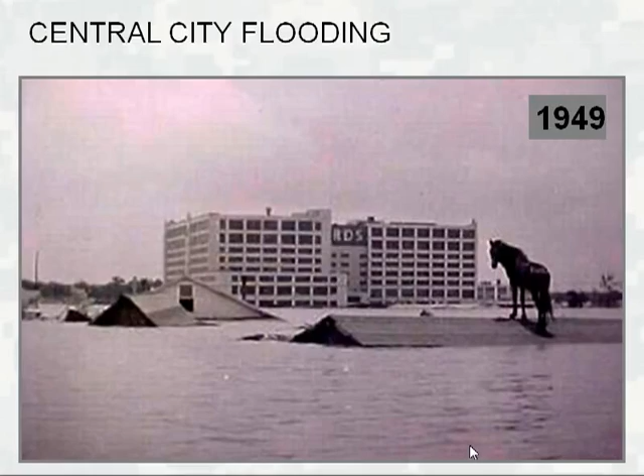It started back in 1922, Fort Worth flooded. Can you hear me now? Back in 1922, 10 people died and 3,000 acres flooded. Then in 1949, I'm sure everybody has seen this picture many times, but there was another flood in Fort Worth. This one was much worse. There were thousands that were homeless.

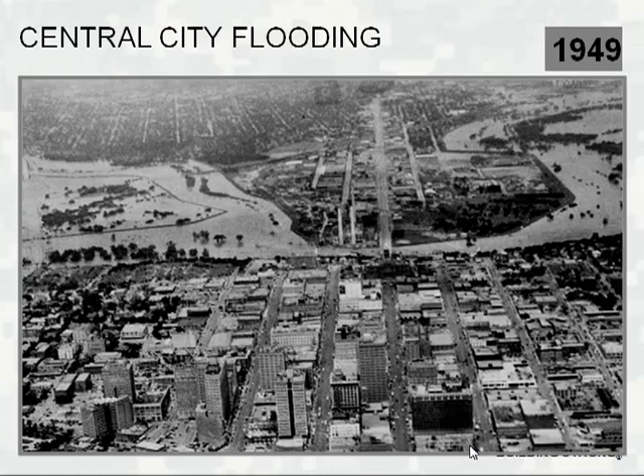So the Corps at this time was invited by the leadership to create a district in the Fort Worth area. We were established in 1950 after the 2 disastrous floods in the area. We're currently responsible for the water resources development in 2/3 of Texas. Not all the state, I wish we were, but we're not. We're responsible for the military design and construction in Texas, Louisiana, and New Mexico. Our geographical area covers 410,000 square miles.

Since the inception of our district, we have constructed 25 lakes, 2 major floodways, many local projects, and 2 tunnels for flood damage reduction. The cost of all these projects, in 2005 dollars, is $3.2 billion, but it's prevented more than $70 billion worth of flood damage.

Besides the flood damage, the lakes and the floodways have provided numerous opportunities for millions of visitors, while we furnish about 35% of the state's water supply.

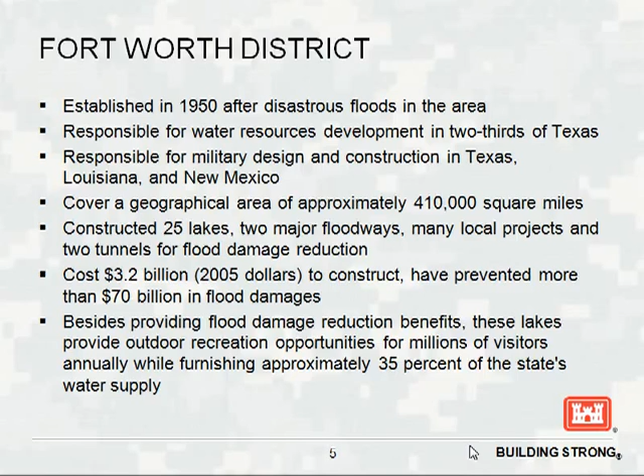Another concern that was presented to the leadership, besides the flood aspect, was the growth that was happening over in Fort Worth. The levee was constructed back in '57, designed for a 1960s population. However, in Tarrant, Parker, and Wise counties, the population has just exploded since then, and it's caused numerous drainage problems and added to the issues we had with the levees. Right now, we're projecting that Fort Worth grew 39% just in the last 10 years.

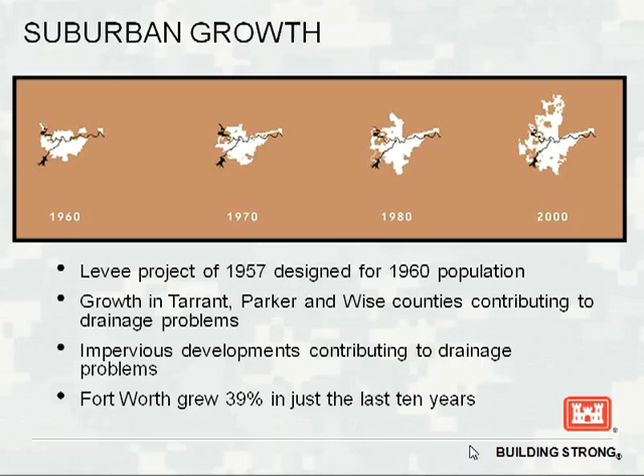So for the government to get involved in a project, we have to be authorized. I'm sure those of you that have worked with the Corps, worked with the government, all know this, and so some of my presentation may be redundant to you, but in 1965, the River and Harbor Act actually authorized this project for the Corps to start working in these flooded areas.

In 2003, the Trinity River Master Plan was created with TRWD, Tarrant Regional Water District, and TRVA, Trinity River Vision Authority. The Energy and Water Development Appropriations Act, or what we call WRDA, then gave us the authority to actually work on the modified Trinity River Vision Plan as far as the government is concerned.

Without that, we wouldn't be able to spend the government's money, but they did put a cap on us that the costs were not to exceed $220 million, and that it had to be split 50-50, with the Corps part being $110 million and the sponsor's part being $110 million.

There's projections, and I get a lot of questions about, is it a true 50-50? There are some things that the government doesn't work on. We were not authorized on this project to do any HTRW, so the sponsor has to do any environmental cleanup before we can proceed in a certain area on the project. So even though it's a 110-110 split, it's not a true 50-50 split.

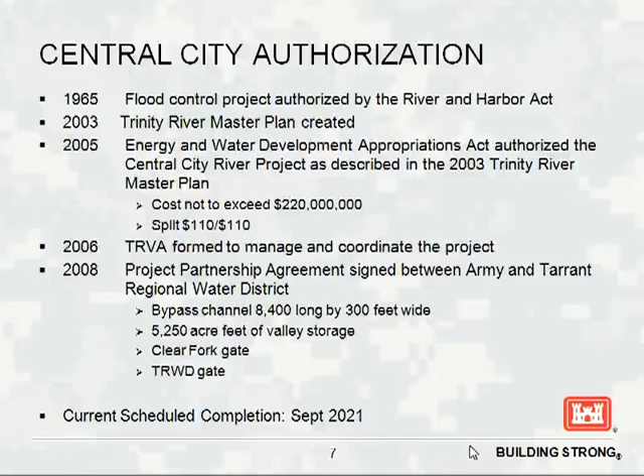The partners that we have, our sponsor is the Tarrant Regional Water District. The portion of that district that I work directly with is TRVA. Our local partners are the City of Fort Worth, Streams and Valleys, and Tarrant County, and we all work very closely together. Other interested parties in this project are the Federal Highway Administration and Texas Department of Transportation.

This is the current levee system that we have. And if you'll notice, the buildings are all set way back from the water.

When the project got started, TRWD had a lot of public meetings. One of the things the public always wanted to know is, why can't we have a waterfront like San Antonio? That was a big deal to the people. They wanted a river walk. They wanted to know why the buildings have to face their backs to the river instead of the front, and couldn't we make the river more friendly to the people?

So they came up with a combined goal. The Corps and the government's main priority is flood protection - we are in the business to save lives. But we also note that people in general like the San Antonio Riverwalk. They like being able to go to the river, go swimming and kayaking, and have parties in the water. So we have combined goals.

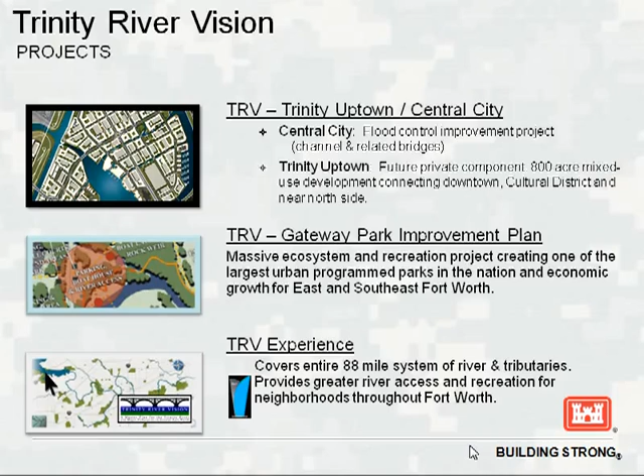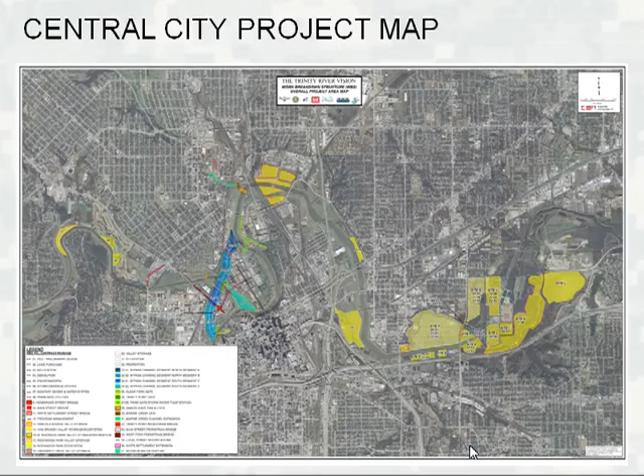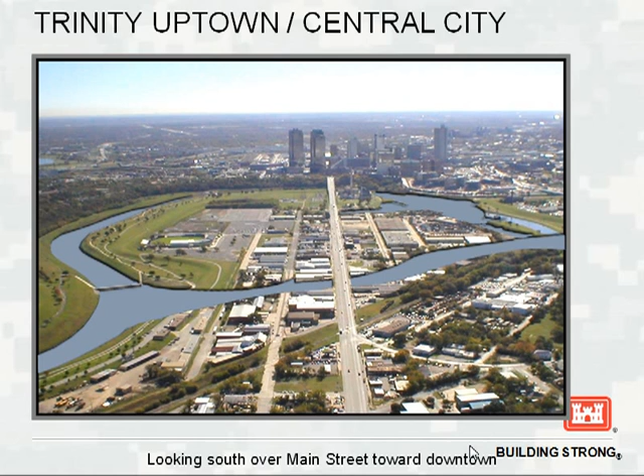This is a picture looking from the north back down to the south of Fort Worth. The Trinity River is currently in this location. When we get done with the bypass channel, it will reroute the river. Once the bypass channel is built, all the levees currently on the inside of that island can go away - they will not be needed any longer. That frees up a lot of real estate on the inside of that island for residential and commercial use.

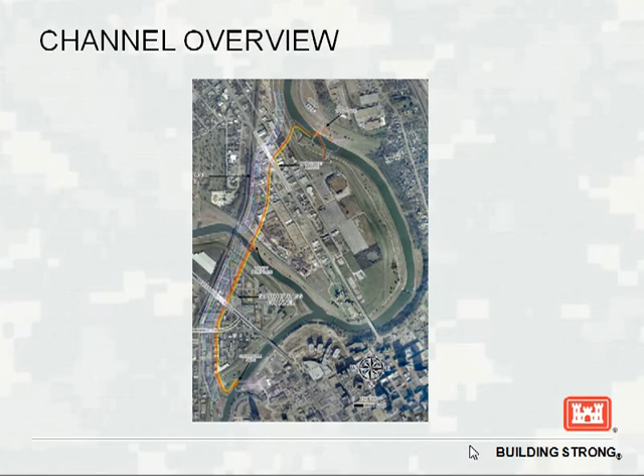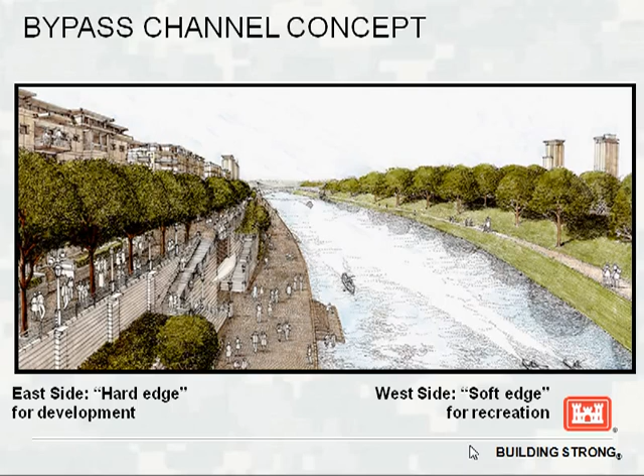This is an artist rendition of what the channel is going to look like. Back in 2007, 2008, TRWD and the Corps got together and went to Vancouver and built a model - a 1:40 scale of this entire channel. They had to run all the H&H modeling to make sure everything we were planning wasn't going to make the floodwaters worse, either upstream or downstream. This is the model they came up with. If you look on the soft side, you'll notice the artist has put trees on the levee - the government doesn't allow trees on the levee, so the artists take a lot of leeway with what we can and cannot do. But this will give you an overall impression of what it's going to look like.

And if you're standing on the soft side, looking across the channel to the hard side, this is what that will look like. These are all conceptual at this point. We're still in the final design phases on part of this.

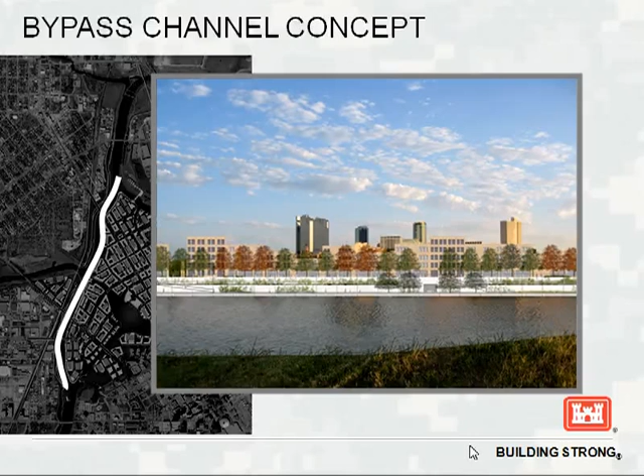So how it will be built, we have quite an extensive sequencing for this project. First come 3 bridges. TxDOT is currently working on getting 3 bridges built: Henderson, Main Street, and White Settlement. These bridges are going to be built in the dry.

Part of what the Corps has to do is, as each construction contract is let for the bridges, when their contractor gets in and clears out an area on our hard side, the Corps will then go in and install the piers for the hard wall. Then the bridge contractor will come back in and finish building the bridge. We have to sequence it that way, because if we did it differently, we would have to have the city come in and take off part of the bridge in order for us to drill our piers. So it's a sequencing of: they start the bridge, we come in, we do our piers, we get out, and then they come in and finish the bridge. It's a timing issue.

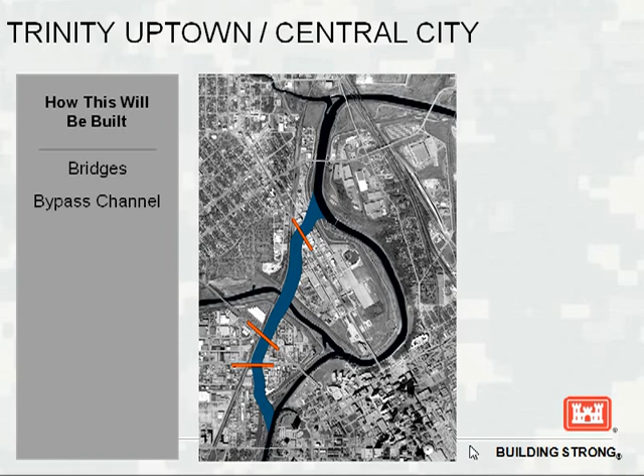After the bridges get done, then we can start actual construction of the channel. The channel itself is phased in 4 different sections.

At the same time that we're building the channel, we'll be building the valley storage. Valley storage is needed with the way that we're building the channel. In order to not disrupt the flows downstream and the flows upstream, we have to have a lot more valley storage area. And the valley storage area is intended to flood. It will flood.

We're projecting at the 100-year event that all of these areas that you see will be underwater, that were yellow on that first map. After we get the storm water management done, all the valley storage is in place, and the bypass channel is open, then we can work on the isolation gates.

And the isolation gates are what is going to keep the islands dry. There's also going to be a storm water pumping station on the inside of the top gate that you see. In the event that the storm waters on the island flow too much into the channel, we have the ability to pump that water out into the Trinity River.

Once the gates get built, then we'll have a dam and a lock. And the lock is needed. There's going to be, in the future, the capability to go from downtown Fort Worth, either on a kayak or a water taxi, all the way to the stockyards and back by water.

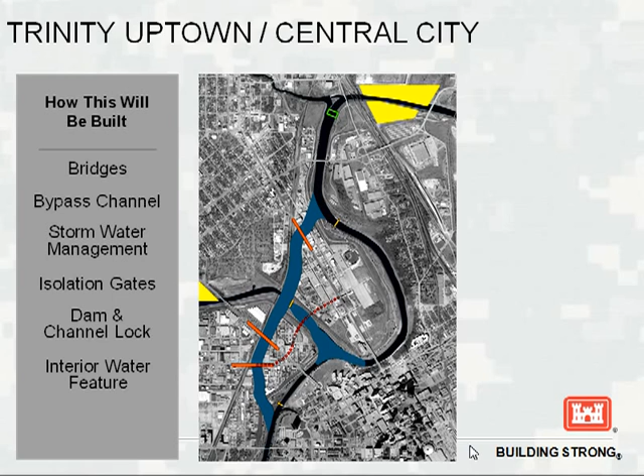The interior water feature, the Corps will not be a participant in this feature. This will be purely sponsored, but it is a part of the overall project. And then this is what the sponsor is projecting as an artist rendition of Trinity Uptown once it gets completely built.

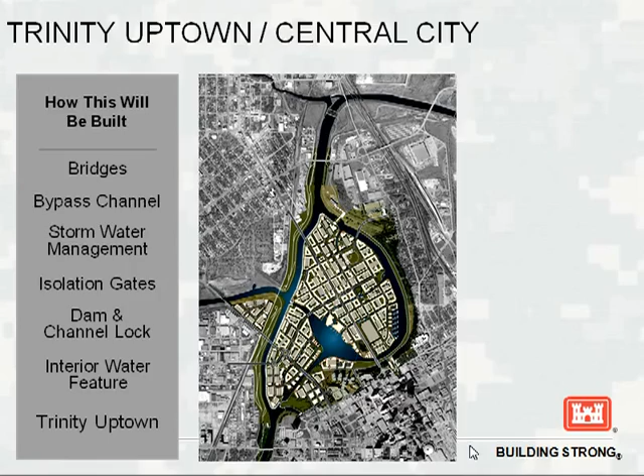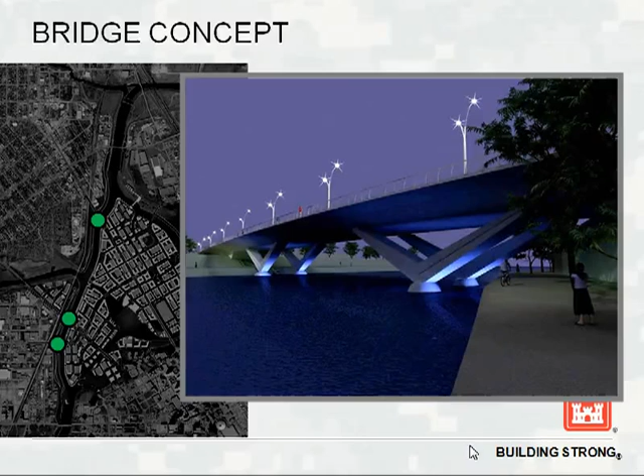So we start with the 3 bridges, and this is a rendition of the bridges that TxDOT currently has out. Henderson, we're projecting to start this year. Main should start this fall, and White Settlement should start next year.

Now, Valley Storage. Gateway Park is a big area of Valley Storage for us. When we get done with Gateway Park, we're only working on part of it. We are not doing the recreation part of it, but we are restoring the Oxbow part back to its original features, and we are doing some grading.

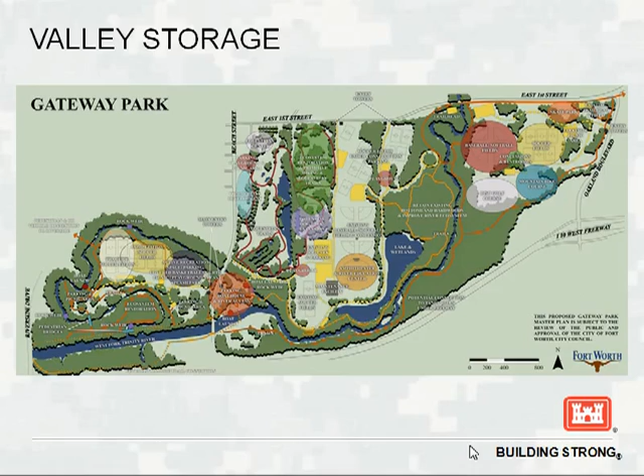But other than that, the rest of this, what you see, will be all sponsor done. The sponsor had a great idea - we would have had to take out 350,000 cubic yards of dirt. So in order to save the project money, they went out to the public and said, 'Public, we have all this dirt. If you want it, come get it.' And this is the result - they cleaned out 350,000 cubic yards of dirt. That is a tremendous cost savings to the project.

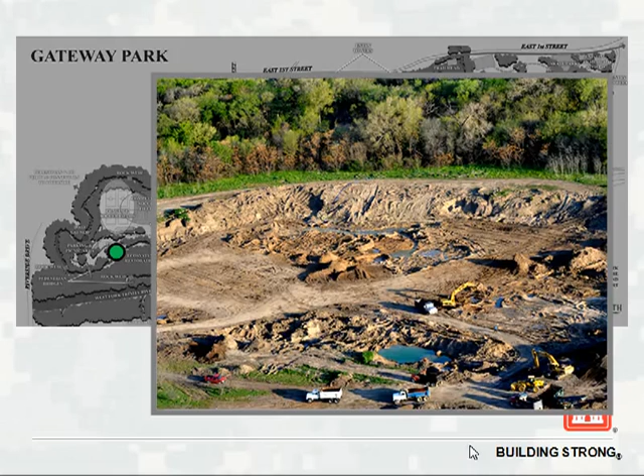This is another section of Valley Storage, up by Samuels Avenue. When this Valley Storage area was completed, the city or the sponsor decided to try and find a business that would start getting people interested in the river. A gentleman came by and said that he wanted to do waterboarding - you know, surfboarding with the big boat wake. So you try and think, okay, there's no waves, that wouldn't be a good thing. So wakeboarding - correct, stand corrected, it's wakeboarding.

So, all right, there you go, my nerves are shot now.

So anyway, what they did is they contracted with this gentleman, and he created a little thin, narrow strip for beginners to learn, it's just a straight shot. Once you get used to riding on your board, there's a wire that comes around with a handle, and you hang on and it pulls you.

So you're skiing without a boat, and it goes all the way around that inside little lake. He built this knowing that if we needed to, it would flood, so there's nothing in there that can't be replaced. Right now he has a contract to run that business, and you would be surprised.

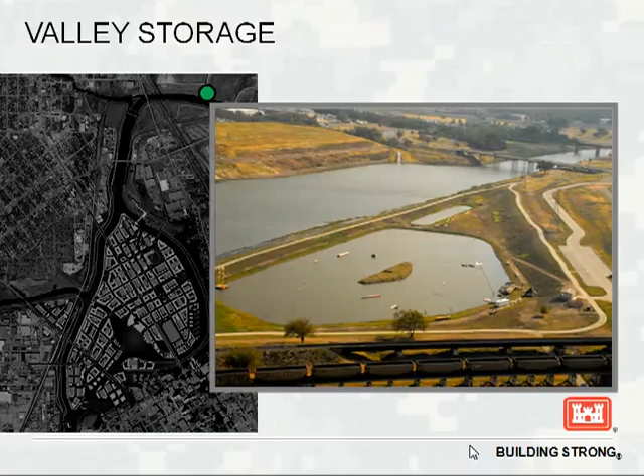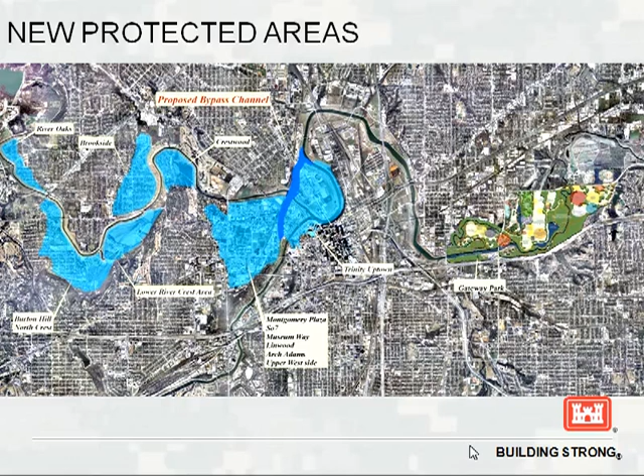Once we get done, all the blue will then be protected from flooding. It is not currently protected. So there's a lot of homes that in the 100-year event would now be protected.

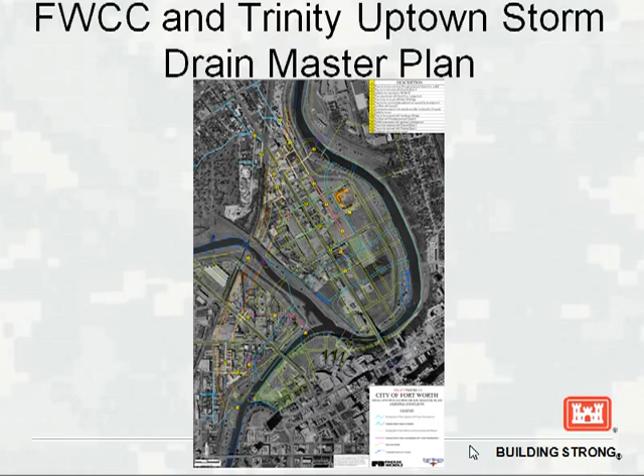For more information, it's on our website, and also on the TRV Education Center. They've got a fabulous display, if any of you get a chance to go look at it. They have just been an awesome partner to work with, I can't say enough about their cooperation. It's been the best sponsor I've had on any project I've worked on for the government. They've been amazing. Some of the slides you've seen today are actually ones they've allowed me to use, they have an awesome graphics department. So I have to thank them for the use of their slides.

Does anybody have any questions? Did you get the wakeboard? No, I have not. I haven't gone out there yet to do that.

It looks like fun, but I only saw one guy make it all the way around, because they've got jumps, they've got all kinds of fancy stuff out there. People try to do the jumps and the spins, and I only saw one guy that actually made it all the way around without falling off.

Do they have a lot of developers lined up to start actually building the developments once this is done? They have some that have made proposals. The way it's going to be built, the Corps still has a footprint that you cannot build on.